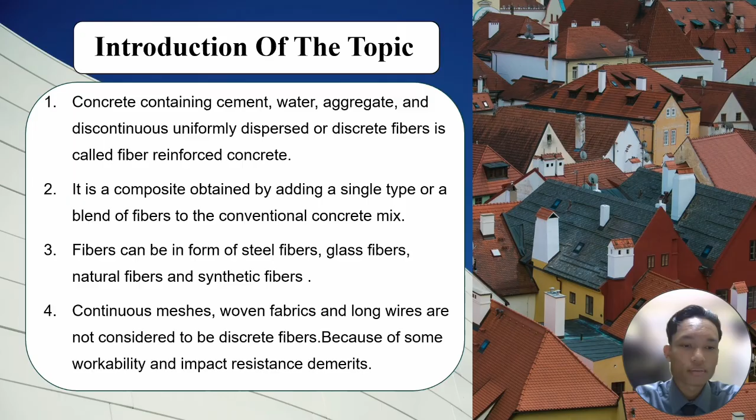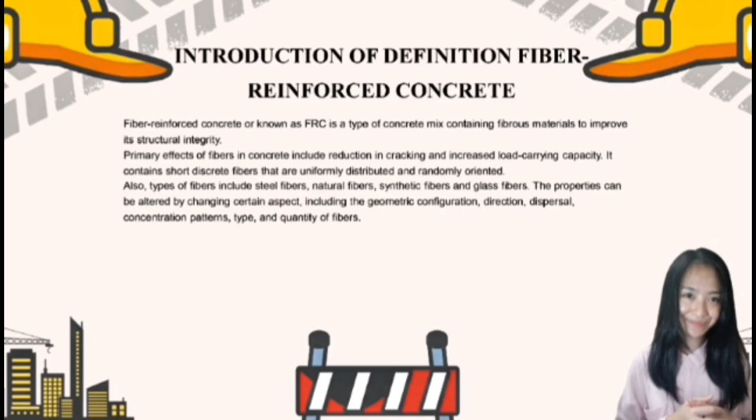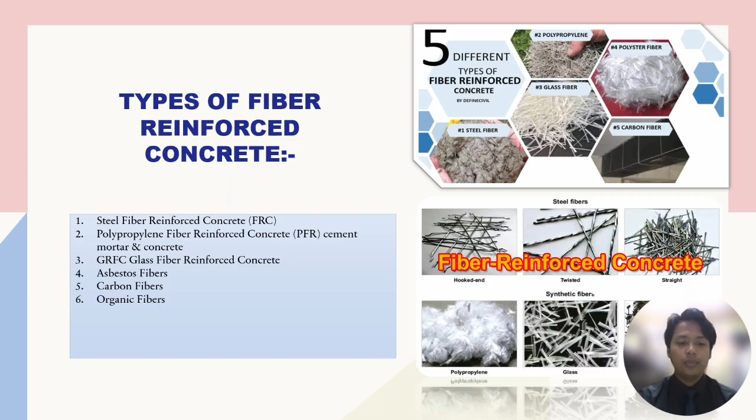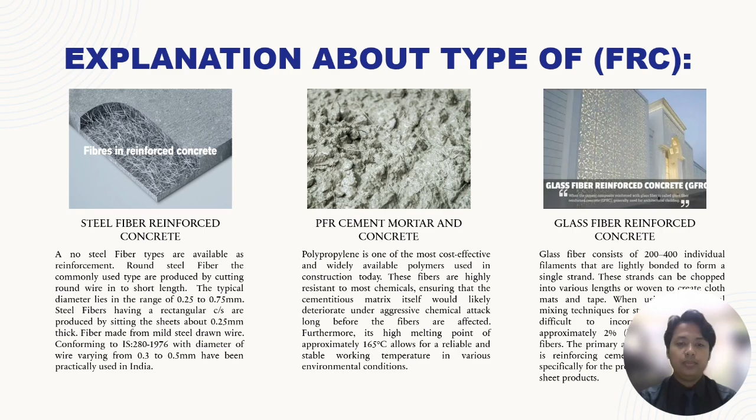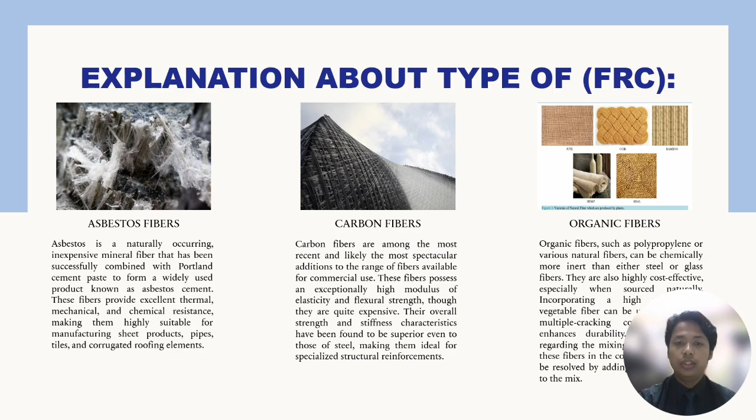Now, I will talk about the benefits of fiber reinforced concrete. There are 6 benefits. First, it has high durability and does not cause corrosion, unlike regular concrete. Second, it significantly reduces labor cost compared to steel mesh. Third, it increases the toughness and energy absorption capacity of concrete. Next, it has high chemical and alkali resistance. Second last, it increases the bearing capacity of concrete and provides effective crack control. And last but not least, fiber reinforced concrete improves resistance against freezing and thawing.

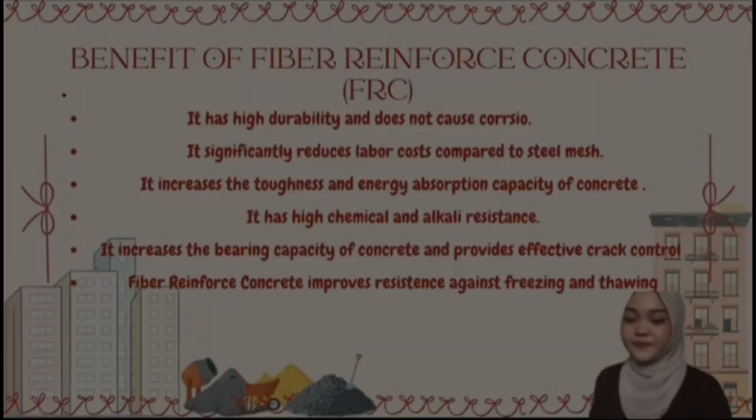So I will talk about the application of fiber reinforced concrete. The practical use of fiber reinforced concrete hinges on the ability of builders and applicators to leverage the material's inherent static and dynamic properties. For tunnel construction, FRC creates ductile, durable linings that resist cracking and spalling, extending service life. Fibers are added to shotcrete for ground support, offering superior crack control and energy absorption in unstable ground.

For traffic areas, the enhanced toughness and impact resistance of FRC better withstand repeated heavy wheel loads and sudden impacts, common in high traffic areas. Reduced spalling: the fibers help hold the concrete matrix together, lessening the breakdown of edges at joints and cracks.

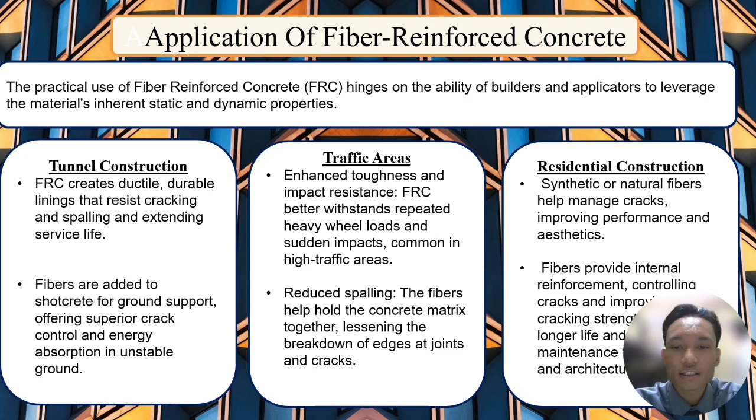And the last one, residential construction. Synthetic or natural fibers help manage cracks, improving performance and aesthetics. Fibers provide internal reinforcement, controlling cracks and improving the cracking strength for a longer life, and maintain the architectural design.

Although fiber reinforced concrete offers many advantages, it also presents certain disadvantages. The first one is it must be mixed carefully. Fiber reinforced concrete must be carefully mixed and evenly dispersed throughout the concrete, because improper mixing can lead to a high margin of error, causing fibers to bunch up, which affects uniform dispersion even if monitored carefully.

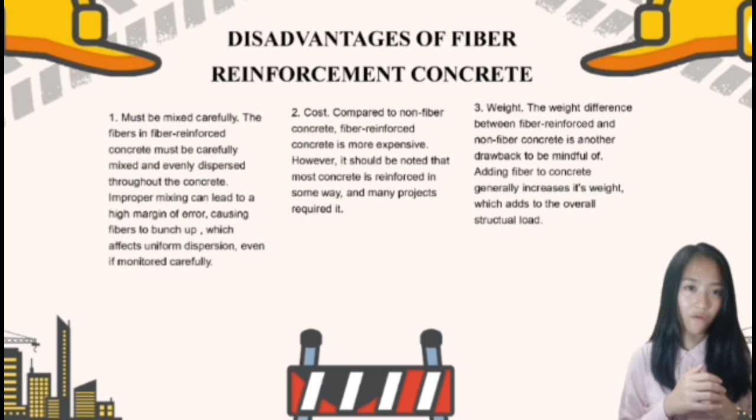The second one is the cost. Compared to non-fiber concrete, fiber reinforced concrete is more expensive. However, it should be noted that most concrete is reinforced in some way and many projects require it. The third one is the weight. The weight difference between fiber reinforced and non-fiber concrete is another drawback to be mindful of. Adding fiber to concrete generally increases its weight, which adds to the overall structural load.

So, in conclusion, fiber reinforced concrete enhances traditional concrete by adding small steel, glass, or synthetic fibers to the mix. While standard concrete is strong under compression, it is naturally brittle and prone to cracking when bent. The added fibers create an internal network that significantly improves toughness and resistance to impacts, vibration, and extreme weather.

The primary benefit of FRC is the bridging effect. The fibers act like internal stitches that hold cracks together, preventing them from spreading and causing structural failure. This makes the material safer and more durable than traditional concrete, reducing the need for steel mesh in high stress environments like tunnels, bridges, and industrial floors.